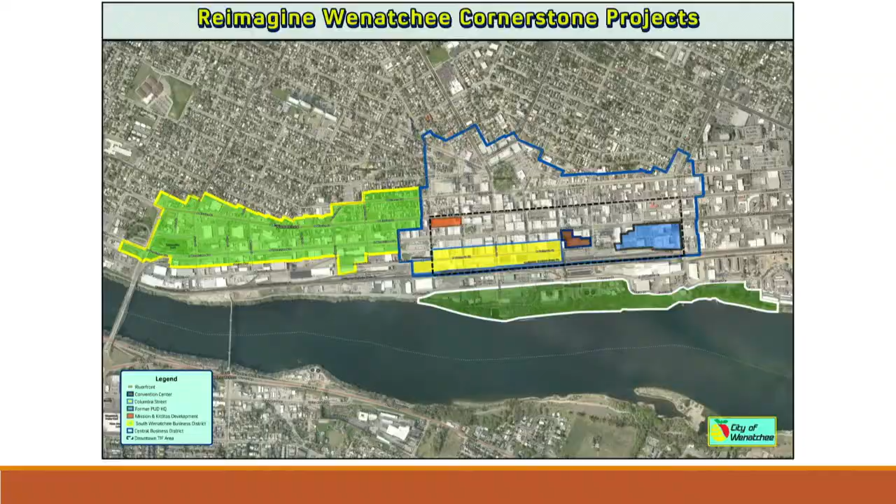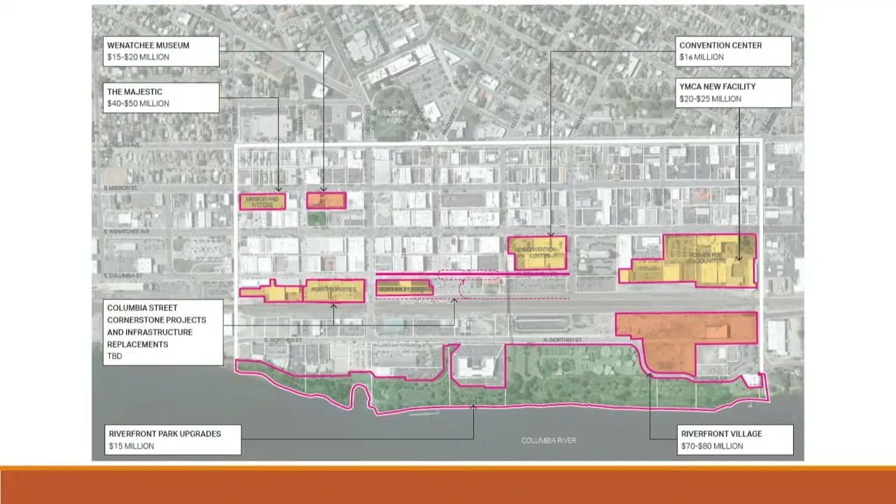This is an even more zoomed-in version. This is really a small geographic area, but Riverfront Park has about $15 million in upgrades over the phases of the project - not all at once, but still a big investment. There's also the Columbia Street project and a lot of forthcoming utility projects we're trying to plan together. The Majestic, the Widener project, is about $40 to $50 million. The Wenatchee Museum, which we'll hear about in a bit, is anywhere from $15 to $20 million. These numbers add up very quickly, and they're generally in a very small geographic area.

So where are we now? We just completed the discovery phase, meaning we met with a lot of folks to figure out what is going on and what the current conditions are. We did a driving tour with our consultant team at Northwest Studios, Link Transit, and the Chelan Douglas Transportation Council to understand the entire city as the scope, and how that fits and impacts the smaller study area, looking at it from a transit and vehicle perspective.

We also did a walking tour after that with a bunch of downtown stakeholders. We had about 35 attendees - it was actually very well attended.

We started at the PUD property on the south end and walked along the Ave down to the Columbia Street properties. During that time, a lot of the stakeholders were talking about how it'd be great if we had more housing upstairs in some of these units. This is really a challenge, or this is really an opportunity. So the consultant was collecting all of that feedback and that data.

The last thing we did was an overall public meeting. We invited that group from the walking tour as well as the driving tour to come down and actually start to think: okay, what does reimagining Wenatchee look like? They did an exercise with a postcard, saying, write yourself a postcard from the future. What does Wenatchee look like? That was the kickoff point to say, okay, we've talked about what's here, let's start to reimagine what could happen.

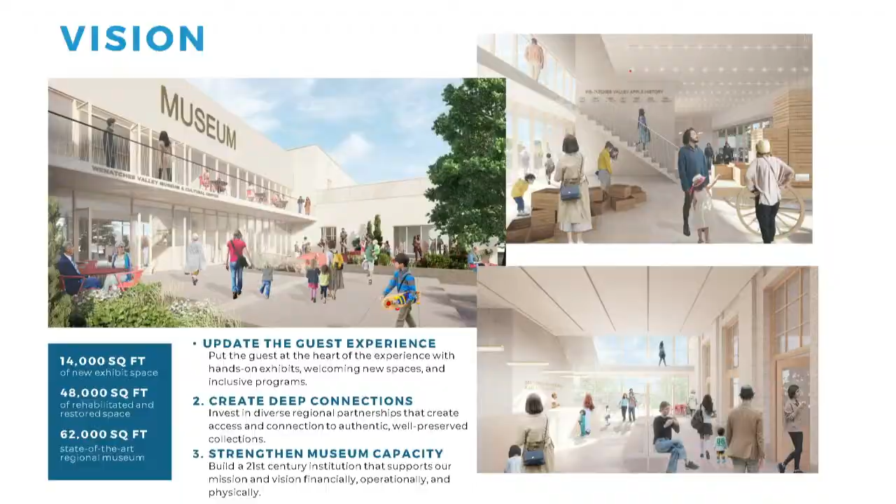From that, this concept came forward: in addition to needing to upgrade the overall facility, we had an underutilized asset at our back door, which was Centennial Park. As the museum, we wanted to use Centennial Park more for our programming, and we found that our community around us wanted to utilize it as well.

So the idea of flipping the front door of the museum, creating an engaging, open, welcoming lobby for the new museum with a new plaza that led into the park, really sparked the interest and excitement in a lot of our community members. We've been able to really see how this will change the museum experience.

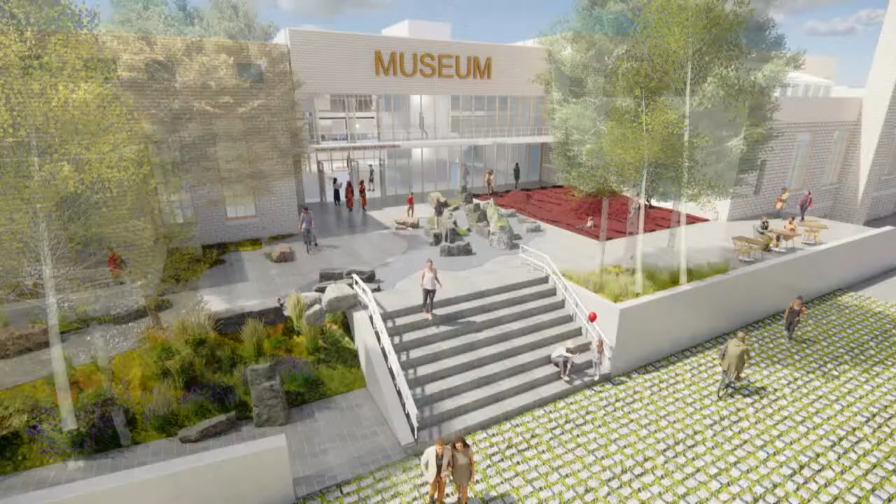It'll open up an outdoor opportunity for us, not only through programming, but just in the daily museum visitor experience. We're taking many of our amenities, like Coyote's Corner, our children's museum, instead of being tucked away on a second floor, bringing that down to the first floor. It's more accessible for families, and it lets us have that indoor-outdoor play space that a lot of children's museums have.

We're also, as you can see right next to the stairs, putting the ramp right next to the entrance of the museum, so everybody who enters gets to enter from the same space. Right now, if you need to use a ramp, whether it's a stroller, a walker, or a wheelchair, you actually have to enter through the back door of the museum, which isn't the most welcoming way to be welcomed in.

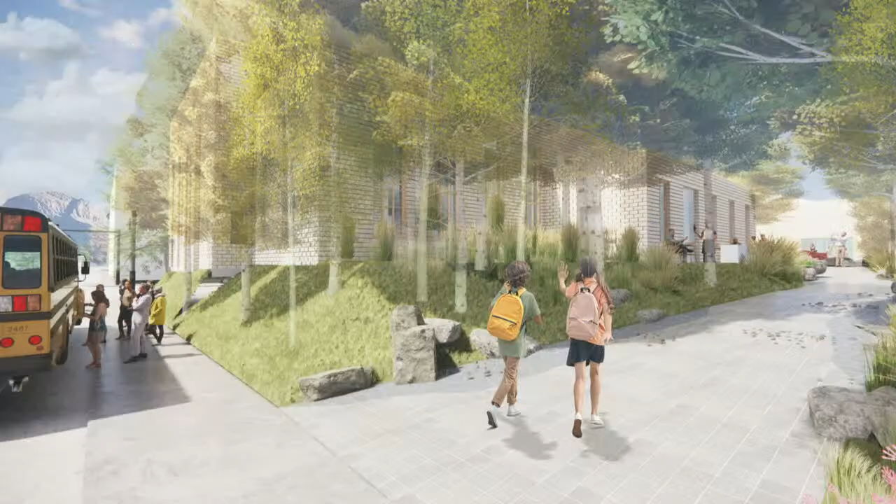School districts, in our strategic plan and our engagement with local and regional schools, are a very high priority at the museum. It was something we heard loud and clear from our educators: not only the museum going out to schools, but being able to come to the museum was very important.

So a lot of the modifications we're making are making it safer and easier for school buses to pull up to the museum, for a large amount of students to unload. Right now we have 2 school buses show up and suddenly 150 students are right there on Mission Street. We all know how busy Mission Street can get, and walking up a ramp with basically 1 door to get through takes a while for those kids to get in.

We're reconfiguring it so Yakima Street, which is a much quieter street, buses will be able to pull up there. There will be a ramp right there, and a large amount of school kids will be able to exit the sidewalk quickly and get into the museum.

We're also looking at the new lobby of the museum. If we rewind to that first picture, it showed this hyphen building right in the middle. It's mostly a glass structure, so a light-filled lobby. We're going to ensure that the historic parts of the building, those exteriors, become our interiors, so we're not going to be hiding them away, and they're not going to go into disrepair.

They're going to be right there in the walls of the new building, putting people up close to historic preservation, but in a light-filled way, with a central elevator and central stairs right there, and the opportunity to bring out more of our collections, putting collection pieces into the new architecture of the building.

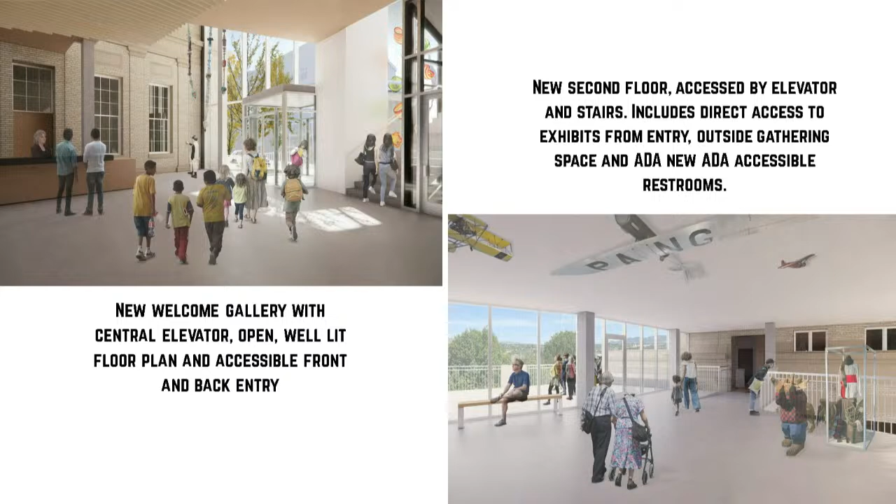That way there's safe access from the park, from downtown to the museum, and safe access from the parking lot right off the park. We're hoping it'll transform that neighborhood of Wenatchee Avenue. We're aware of developments happening close by, especially with the potential of many new residents coming in. With 200-plus households right next door to the museum, addressing the museum and the alleyway will ensure those residents have a safe and welcoming way to come into the museum.

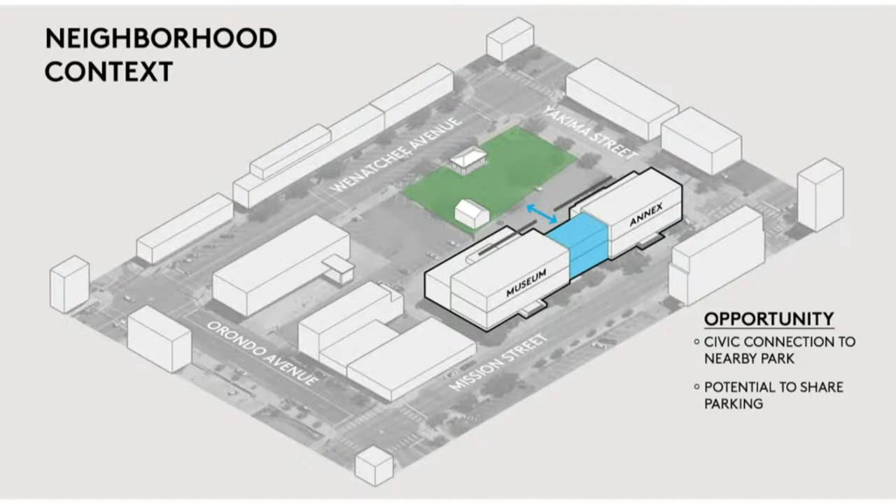By reactivating the park, we're hoping it will be an activation point for businesses along South Wenatchee Avenue. A lot of the foot traffic we see right now stops at Orondo Avenue. With a renovated museum and a reactivated park, pulling that walking traffic down Wenatchee Avenue will be a benefit for our neighborhood.

The site work, which includes the new plaza but also new public works like fire hydrants—we're putting in 2 new fire hydrants down there. We're rehabbing the alleyway too, since our maker space is right off the alley. It's not in great shape right now, and we want it to be a welcoming and safe place to walk up to.

In addition, we've estimated anywhere from 4 to 6 million for new exhibits—not only along the second floor of the museum, but also new exhibit spaces downstairs.

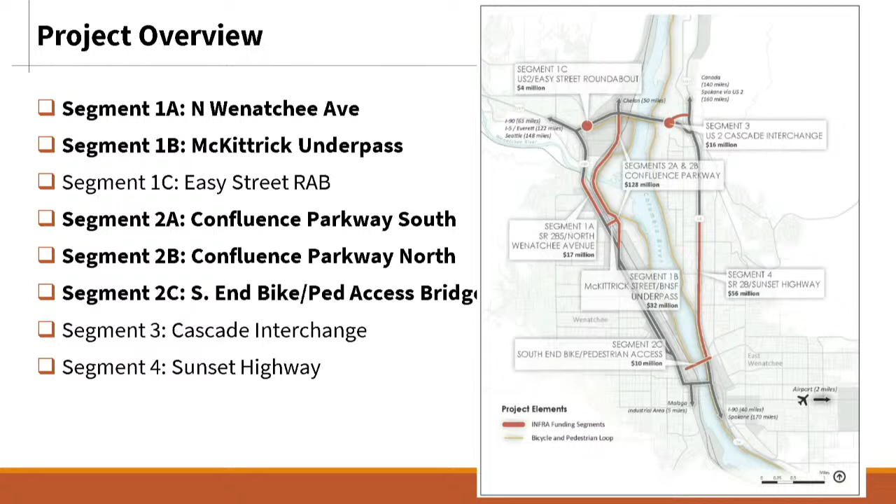So just to kind of set the stage, the first part I'll be updating you guys on is Confluence Parkway, which is really a combination of the McKittrick Underpass and then Confluence South and North, because we are delivering those as a single project. In the spirit of a work session, I'll go through this, but if you guys have questions, just hop in and ask me. Of course at the end I'll want to answer any questions you have as well, but happy to have this be an interactive discussion.

Just to update and make sure we're all on the same page in terms of what the project was, an overview here: the primary goal is to create a new north-south route through Wenatchee, paralleling SR 285 and providing another access across the Wenatchee River. This builds a 2.5-mile arterial street, primarily to provide congestion relief on 285, which in addition to cars, also improves the reliability of our transit service, as well as providing an additional route for emergency evacuation on the north end of town, where we are constrained by the Columbia, the Wenatchee River, and the foothills to our west.

The 2-lane arterial street will consist of bike lanes, sidewalks, and a 2-way left turn lane where appropriate. We are eliminating 3 existing at-grade crossings of the railroad through the corridor, constructing 2 new grade separations, building a 700-foot long bridge across the Wenatchee River, and relocating about a little under a mile of the Apple Capital Loop Trail, which is the location where it parallels Hawley Street, kind of as a sidewalk there between the road and the PUD parking.

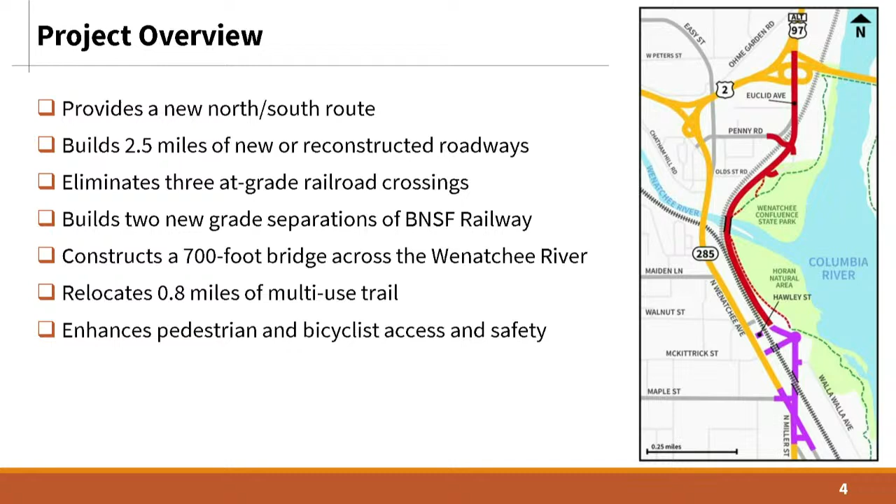So the project was broken into two segments, really. As I said before, the INFRA award only funded the Confluence South, so that's everything from Hawley to the south. That includes the 2 grade separations and some reconfiguration of the intersection at SR 285, Wenatchee Avenue, and Miller Street.

The Move Ahead Washington funds received can be used on that Confluence South segment, as those were a Confluence Parkway infra match amount. This will be the primary focus moving forward, because with the grant came deadlines - we need to obligate all of those funds by next summer. So we need to advance our design, determine the actual scope available within that funding that meets the purpose and need of the project, and provide that to the feds to release the remaining funds. If we miss that deadline, the funding is at risk of being lost. That's been another reason for the whirlwind this year.

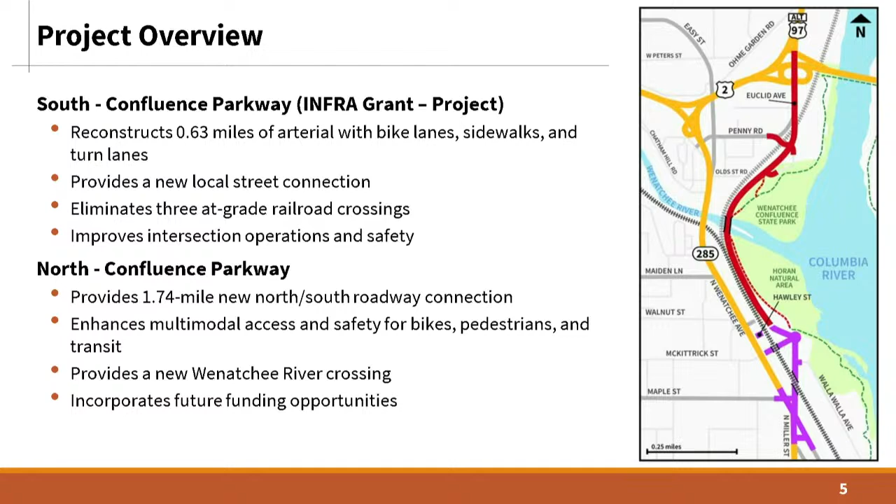A few other key considerations were also discussed, and I wanted to share those as goals that rose to the top over the course of our procurement process. With a project of this size, it's a major investment for the city. We're adding 2.5 miles of road, 3 new bridges, and a lot of other related features to our system. So building a facility that minimizes our long-term maintenance and operation will be a key consideration in our decision-making going forward. We really want to set future Wenatchee up well with this investment.

Landmark for the future - it's a big opportunity with this major project, and we want to make sure we walk away with something we're all proud of. This new bridge over the Wenatchee River will be accessed by everyone from cars, buses, bikes, and pedestrians. We want this to be something our children can be proud of for years to come. Part of that is making sure the decisions we make on this infrastructure fit the access, aesthetics, and other things of the area and surrounding infrastructure.

Last but not least, we want to maximize the project with the funding available, and also the deadlines, most importantly. So making good, effective decisions on right-of-way acquisitions, utility coordination, and all those other things in order to meet our deadlines and use all this funding.

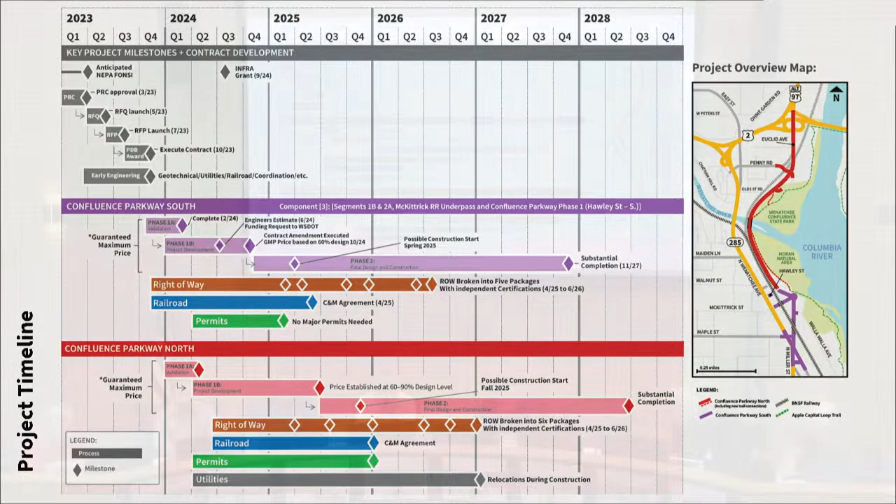So moving everything as you're driving north to the left, so that you're preserving Miller Street and raising it up over the tracks, how does that affect the existing businesses in that area?

So one of the things we considered when looking at this, and we've met with the owners of that complex, including showing this exhibit, is they have access right onto Miller Street as it is. When we started really looking closer at the line work developed in the preliminary configuration, there are going to be big impacts to those businesses and how they operate. It seems there's a strong likelihood that it will result in a total acquisition.

And so if we're going to be acquiring those parcels and paying to relocate them, by shifting this we can now avoid impacts to the other side of Miller Street.

But raising it up high enough doesn't give them access, or it just doesn't work for support of the raised road? No, so whether we go over or under, there was going to be significant walls between the tracks and getting towards the Circle K lot there.

You can kind of see the little blue boxes, and that was something we were tracking, looking at the accesses and profiles to make sure that where those existing accesses are, knowing where the driveways would be and if they are still feasible to remain.

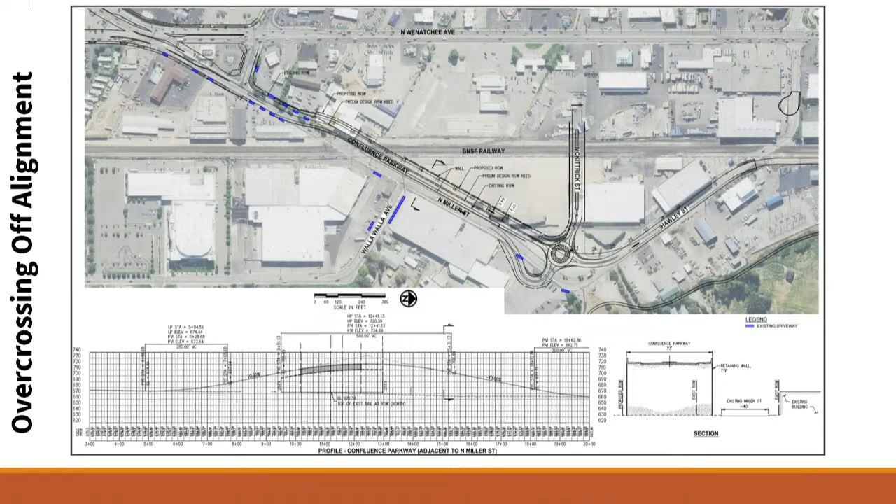Another part of this, in addition to the large utilities under Miller that were looking to be problematic if we go under, was working with the railroad. If it is feasible to go over, it could be an uphill battle with them to go under, because with an overpass, that will be our bridge, but if we go under, that's a railroad bridge. They would much rather be on fill than be on a structure themselves - it limits their future growth opportunities and increases their maintenance. That was another consideration that was looked at.

You've done a lot of work, you got a lot of work to do, so congratulations to you and your team. It'll be fun to see this work its way through, and I know there's a lot of moving parts. I know the 85 million has a little bit more flexibility than the 92 million does, so I know you're really juggling to figure out, and the 92 has got a time frame that's got to get cranked. I know you're taking that all into account as you plan for it.

It's a good point. As we move forward with this partner, we look at the project as a whole. There's a lot of elements, and we have identified the strategic objectives - I'd say really these two grade separations and the bridge over the river. We need to have an access across the river, so we'll be keeping that in mind, and that's going to be part of that balancing. I think it can lead to maybe some design revisions, practical design opportunities in other areas.

Such as the intersection through Olds Station, where we'll look for opportunities for value engineering, because the biggest cost of the project is absolutely the right-of-way acquisition. We have some parcels we know we have to go out and acquire, the McDougal warehouse, and some of the others are covered in that land exchange agreement. So we'll be working through that, and I know that has been another topic as of late.

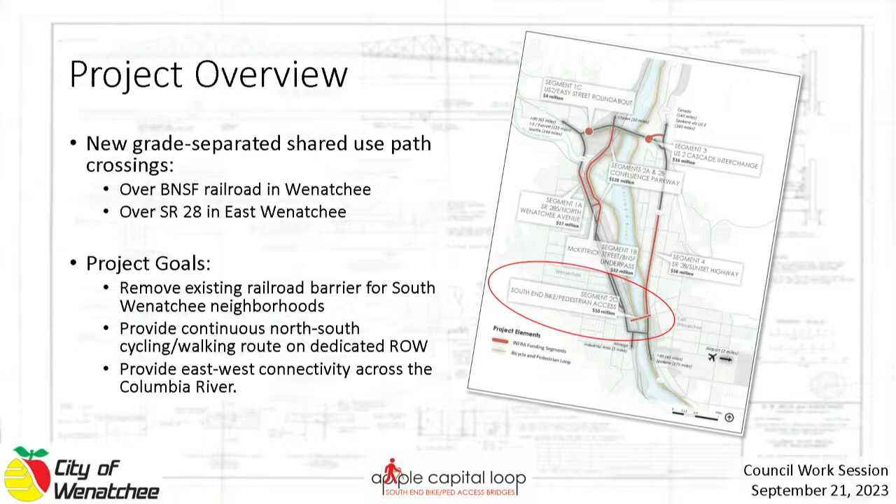So going towards those initial project goals of providing this benefit to South Wenatchee area, we also have other commitments to this area. Emma's leading a South Wenatchee corridor study, which is going to lead to great improvements where we're going to be analyzing channelization and bringing that downtown feel further up all the way to Ferry Street. We've performed a South Wenatchee bicycle connectivity study through the Chelan Douglas Transportation Council, which is very reflective of the need for this South End bike ped bridges project.

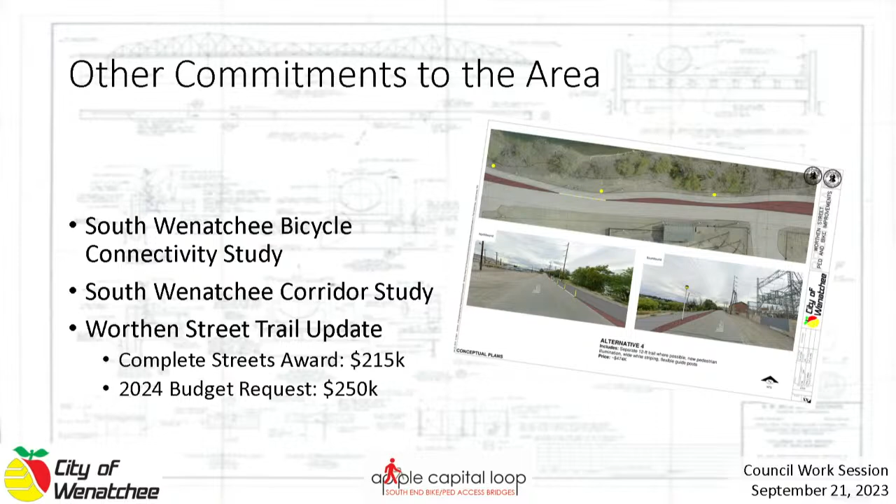And then we're also working on a Worthen Street Trail update, which you'll be seeing a budget request for next week. So moving back into the Ped Bridge project, we have been underway since June on this one.

We've got a project team in partnership with the City of East Wenatchee, with Exeltech Consulting. They've been in business for over 30 years, and they have a lot of experience doing similar type bridges, ranging from pedestrian and bicycle bridges like we've got going on here to also full vehicular access.

Joining Exeltech is a couple of local partners: RH2, Aspect Consulting, and Northwest Geodimensions. They're performing our civil work, our surveying, and then geotechnical analysis. And then they've also brought on some other partners, Aquaterra Consulting, Eco Assets, and Michael Miner Associates, who are going to really be helping on that environmental aspect of the project.

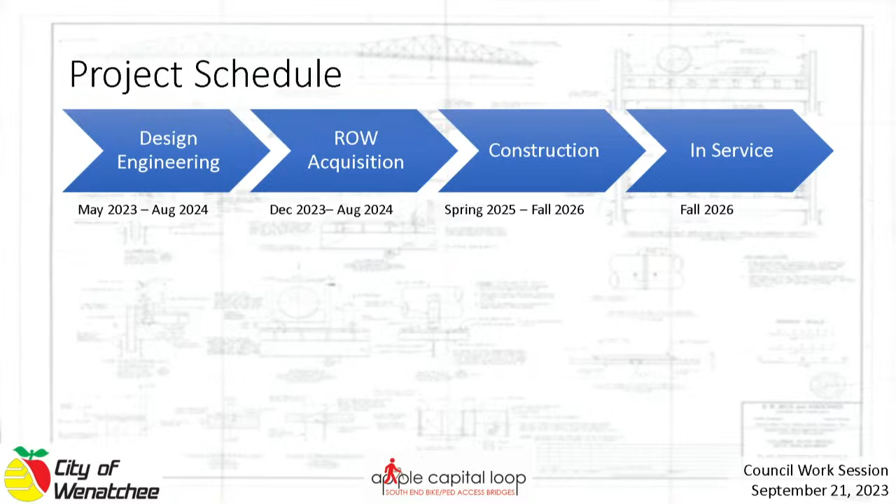Project schedule: we're following the more traditional design, bid, build process. So we're in the design engineering phase right now. We're going to be moving into acquisition once we get completed with our environmental work. Then construction is anticipated to start spring 2025 and ending about 18 months later, fall '26.

In order to get to our obligation date of September '24 next year, like Jake had mentioned, we're making our way through these different steps. As you can see, we have actually just wrapped up our alternative analysis, and we'll go over what the preferred selections were. In that alternative analysis, we looked at a number of different factors: cost, constructability, design delivery time, again to Jake's point of us making that September timeframe, permittability, traffic, constructability.

And at the same time, we were also looking at what this bridge is going to look and feel like in 10 years. We didn't want to limit our decisions based on some of the concerns of making it to the September timeframe. We're committed to doing that, but we want that best product at the end of the day.

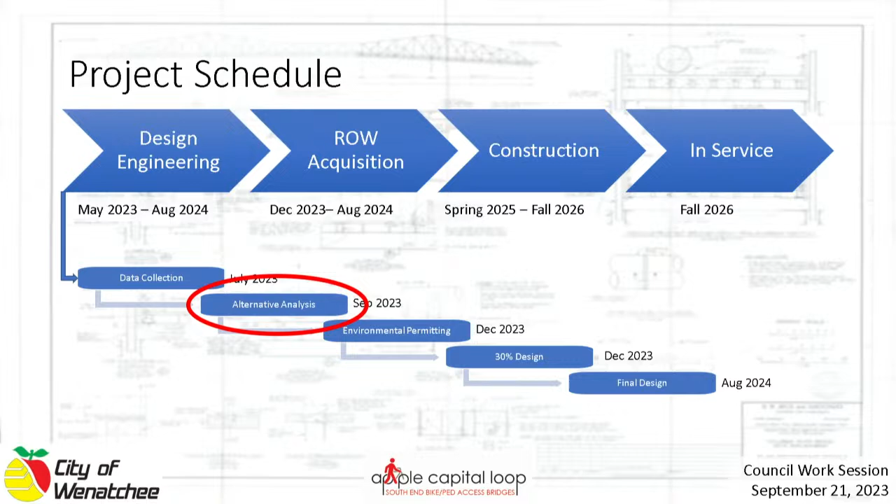So moving forward into this East Bridge preferred alternative, we looked at 3 different alternatives for the City of East Wenatchee's side. One being 2 helical ramps on either side of SR 28, and then this preferred alternative going all the way up to their new 9th Street Park.

We ultimately chose this because of the connectivity that it provides for the City of East Wenatchee's downtown. At the end of this project, you'll be able to go from East Wenatchee's downtown to Wenatchee's downtown on a dedicated pedestrian and bicycle route. And so the placemaking opportunities here and just the atmosphere that we can gain through going all the way up to Valley Mall Parkway was ultimately the decision factor in this.

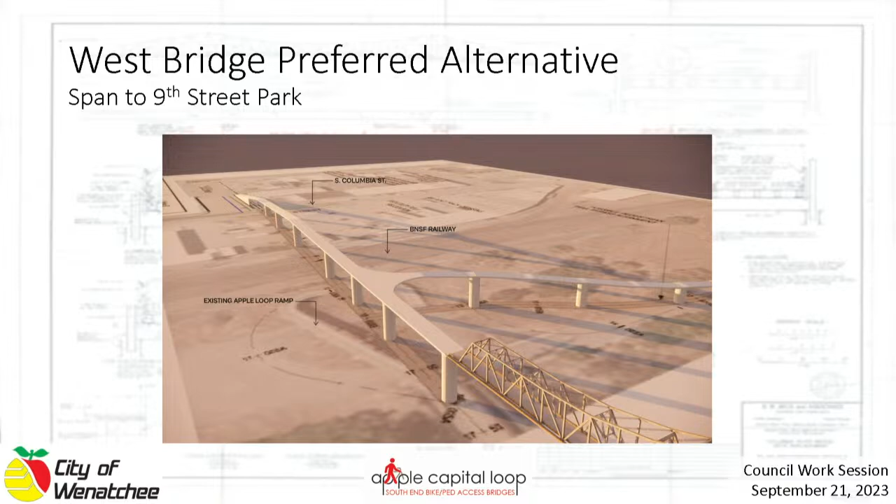This alternative was ultimately selected because of the connectivity and smooth transition for all types of users, bicycles and pedestrians of all ages. It also provides easy access from our South Wenatchee neighborhoods, which is really the point of the project, to get them up and over, either to the Loop Trail or over into East Wenatchee to live, work, and play.

Here's a better illustration of what the final product will look like. There's going to be a new ramp from the bridge that'll tie in down towards Hale Park. You can't see the full configuration, but it's going to hug along the BNSF right of way for a while, then taper back into the Loop Trail. This shows where the helical ramp's going to be coming together.

Exeltech's got a great team, including landscape architects, who are going to be looking at the placemaking ability to make it feel like a very inviting gateway into this area.

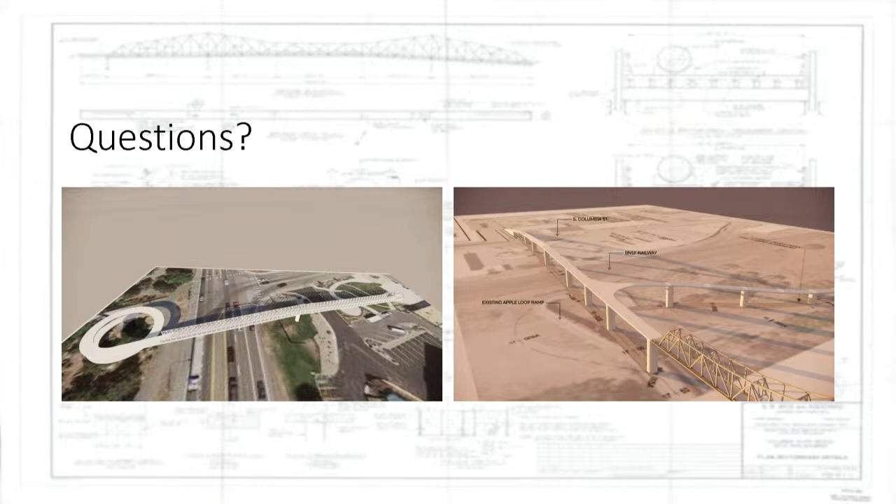So with that, I wanted to open it up to questions. The question was about the width of the new path on the Wenatchee side—when you ride your bike up there, you sort of run into the person coming down, or there's just not a lot of room, or you hit the fence. You can't quite see it here, but it is going to be 12 feet wide. The existing ramp we have on the Wenatchee side is 8 feet. This 12 feet is designed so that two people can be walking and there could be a crossing movement without having to wait or stage to get around.

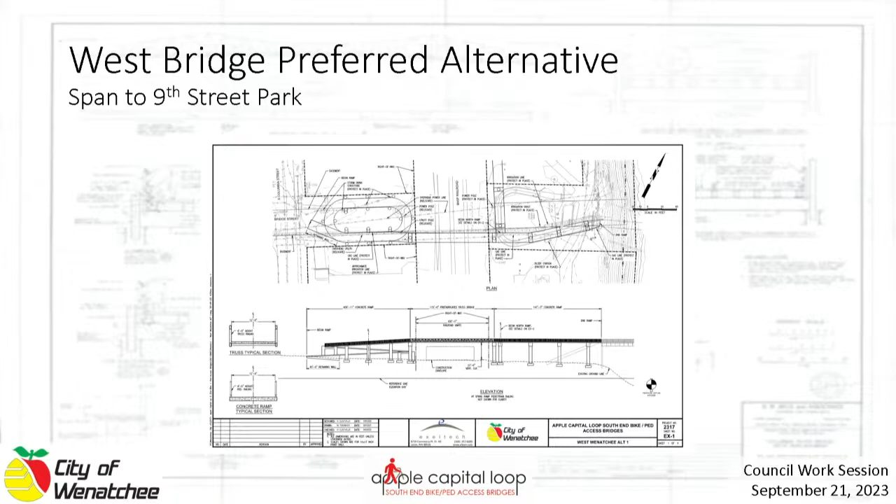Ryan asked about not seeing any lights. This is just the alternative phase, technically 15% design, so lighting is very much an element we're going to be looking at, both for user experience and security purposes, and that will be incorporated as we move further into the design. There'll be lights not only on the trail part but shining down underneath in the little dark recesses where people might tend to gather.

One of the factors we were considering in looking at our alternatives is preventing certain behavior and increasing security in the area. That's why having these raised ramps rather than walls was put in, and that is going to be a consideration. As we move further, we'll work with Dave Erickson to come up with strategies based on what they've experienced in this area and ways to mitigate future interference in that regard.

I have a curiosity related to the overpass concept at Miller and the railroad. What's the clearance that we need above the rail? Yes, so for over the railroad, it's 23 and a half feet. And that leads to our ramps on the Wenatchee side being significantly longer than the East Wenatchee side. That clearance requirement is 17 and a half feet for pedestrian bridges. So we're 24 over railroad, but 17 over highway.

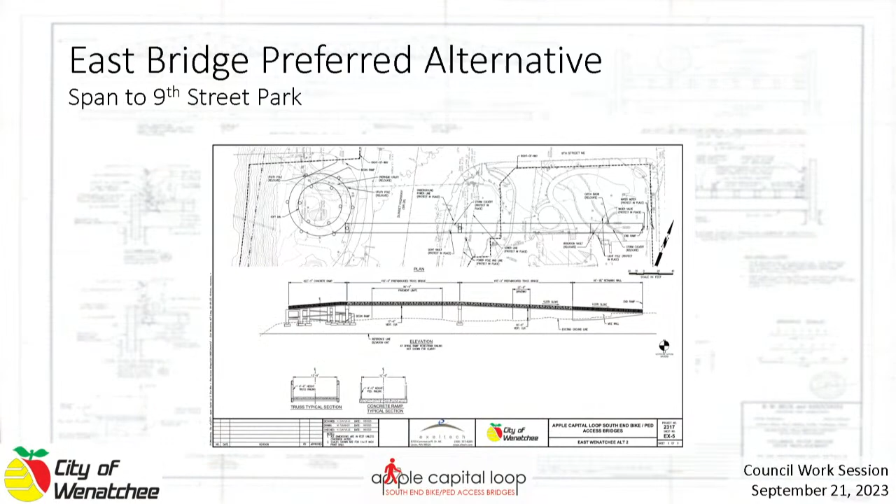No, when I look at the design, it looks like the exit of the helix is across the street over in their plaza, their new plaza. So is that where I get on the trail, or is there also an access from the existing trail? There is access from the existing trail - we'll be going up from the existing trail in the helical motion up and over. There's another picture that shows it better - I think that right there, yes, that's better, thank you.

This lower one on the left is on the Wenatchee side. So you'll grab it, go up, cross over, and land into the East Wenatchee side at the top of the screen. But where it lands in East Wenatchee, I thought was across the highway. It is - it's at their new park. So the existing trail is underneath, on the west side of Sunset Highway now, and you access right there.

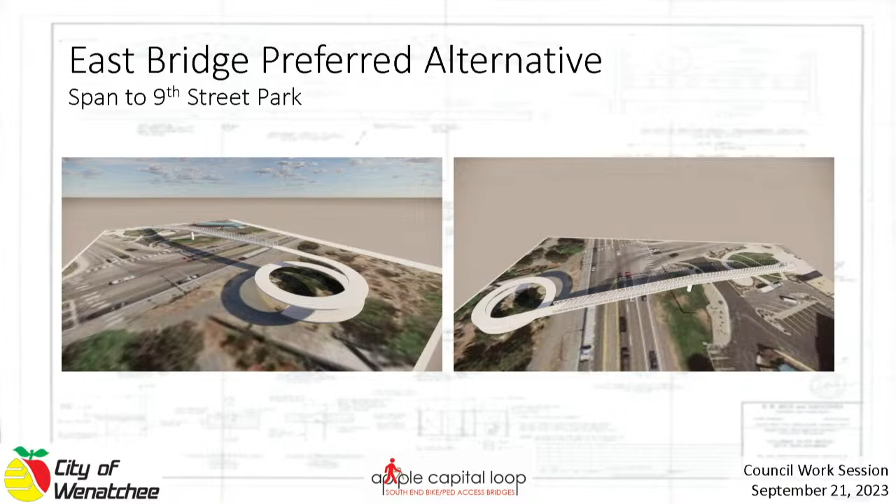It's just hard to see, I guess. Yeah, it's hard to see. Yeah, underneath - the existing trail out to Hydro or over through the rest of East Wenatchee is going to be maintained, and this new ramp is going to be in the location where the boulders and vegetation currently are.

Any other questions for Ryan? I think the Public Works Committee saw this, or the Finance Committee, one of them saw it a week or two ago. I'm starting to lose track of which one.

And to that point, we do have a grant application we're planning on applying for. It's due next Thursday. That will be making us whole on this project, and there's multiple opportunities for pedestrian and bicycle access. So we're pursuing all those. Thank you for doing that. All right, thanks, Ryan.

Emma, did I steal your thunder? I'm sorry, I feel bad now. All right.

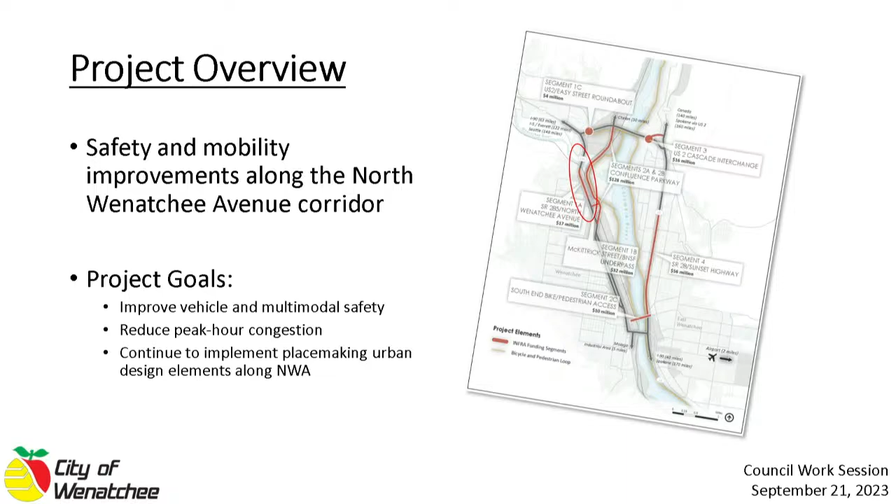So to go all the way back to the beginning, this effort of planning North Wenatchee has been going on for quite a while. Originally, we had KPG partner with us and WashDOT to develop what's called the North Wenatchee Avenue Preliminary Engineering Summary Report. That effort was undertaken in 2018 and 2019, and the intent was to identify design parameters for North Wenatchee Avenue and guide the implementation of the funded portions.

At that time, the Connecting Washington package had gone through, so we had that $23 million for the Wenatchee side, and the scope was just to make improvements. There was no specific scope, and then also to identify a slate of future projects to be funded on the corridor. Up top is the outcome of what that study was.

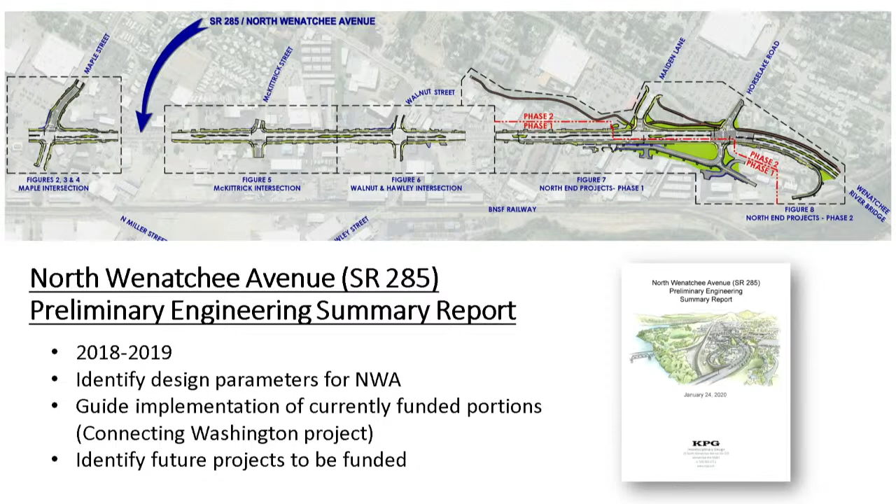It built upon, so there's a North Wenatchee master plan, a North Wenatchee Avenue concept plan, a North Wenatchee transportation plan. There's a lot of plans out there, but at that time there weren't actual cross sections or a specific scope of how to do it. So the point of this study was to complete that planning level effort.

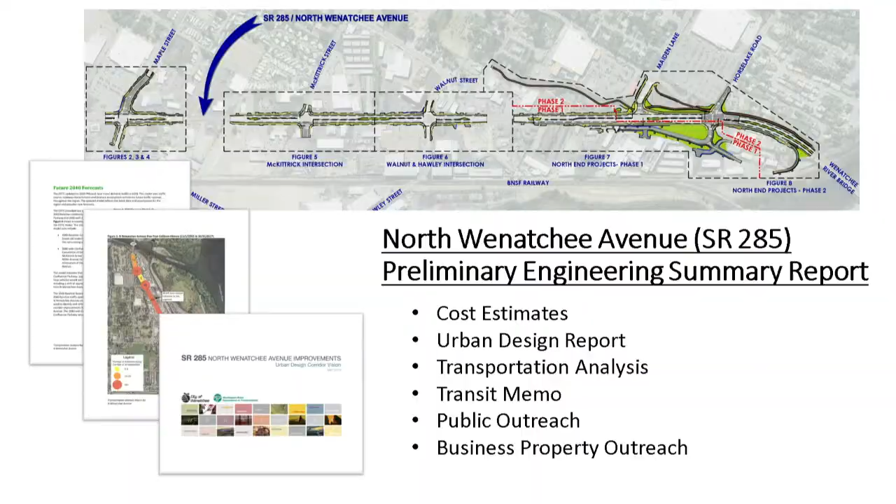Out of that summary report, we also got some cost estimates, an urban design report that outlined those placemaking features, and a pretty good transportation analysis. During that effort in 2018 and 2019, a somewhat significant amount of public outreach was done. I think I saw some of y'all's names on the various reports and public outreach. This next slide shows the result of that public outreach.

I believe that open house was probably at the new WashDOT building a few years back, and the feedback from that effort was that the goals, or what people want to see on the avenue, is better vehicle flow, a safe pedestrian-friendly walkable community, promoting economic growth and development, and also just creating a new look and feel for the avenue, making it feel like a community and a safe place to exist on all types of transportation, not just cars. So since that effort, that summary report was published, I think in January of 2020, and it had a lot of components to it, and it got us going in a good direction.

Since that was published, WashDOT, we got a lot more information. WashDOT performed a survey. We had further information to feed a traffic analysis and a better idea of regional mobility needs. For example, Link Transit had identified a couple needs that maybe hadn't been placed correctly originally in the study effort. So the city of Wenatchee partnered with CDTC, Link Transit, and DOT to nail down the scope of how we're gonna spend the $17 million that's remaining after the Easy Street roundabout was constructed.

So we had several stakeholder meetings and we're not quite done with the final report, but the outcome of that study dialed in the scope for how we're gonna spend the Connecting Washington money and parsed out the phases. Not surprising to anyone, the $17 million is not gonna take us as far as we thought it would in 2019, pre-pandemic, pre-everything. So we wanted to revisit the cost estimates and make sure that we can deliver the project we're committing to deliver, and also just to make sure that the major stakeholders - Link, CDTC, and primarily WashDOT and the city - are on the same page and kind of holding hands and walking forward, and we all agree and we're all on the same team.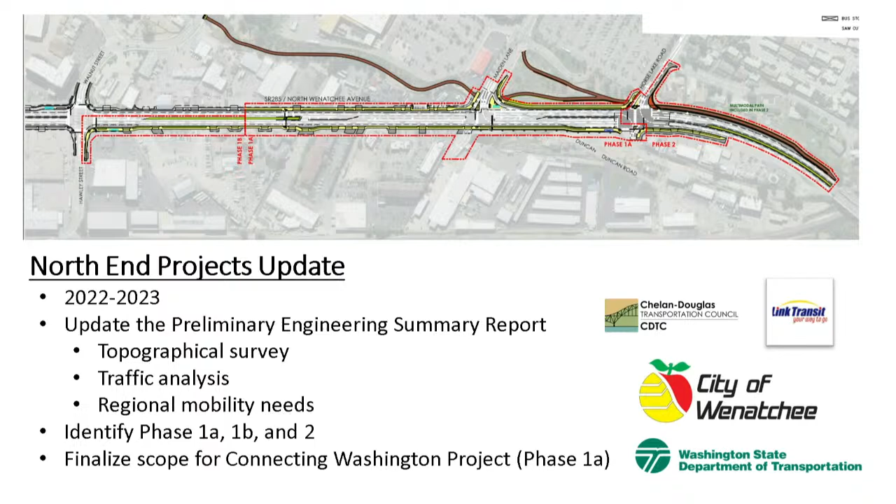So essentially what we decided was, I think it's in the next slide. This middle section, which is phase 1A, is what we are comfortable committing to deliver.

For the past 5 years, it's been undetermined whether WashDOT or the city was going to deliver this project. As part of this effort, we revisited the scope and looked at the stakeholders who'd be impacted, and what the city views as priorities in terms of placemaking. We care about mobility, absolutely, but we also care about our community.

It made sense for us to hang on to the design and deliver it as a city. The $17 million is all DOT money—there's not a local match currently—but it makes sense for us to lead the discussions about right-of-way and access. It's the state highway, but it's in our urban area.

The state should control what it looks like, yeah. It's a very urban project, and the north central region of WashDOT doesn't have a lot of really urban areas. I think we're kind of the forerunner in delivering those kinds of projects, and so I think we can do it.

We're currently in the process of understanding what funding's gonna look like, and as soon as I get the okay from WashDOT, we're gonna get an RFP on the street to pick up a consultant and start moving forward. We have an obligation date we've committed to on the term sheet for the Confluence project of 2026 to obligate construction money.

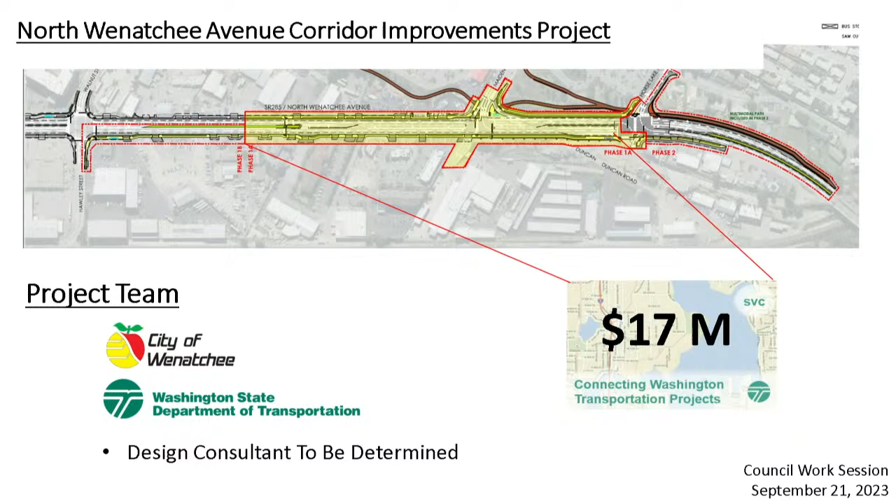So we'll get there. I'll dive a little into the specific features of this project, kind of where we landed. I think some of this might be new, and much of it is what was arrived at in 2018. Essentially, the main elements of the project are a raised median that restricts left turns off.

So is this all right in, right out? Yes, all right in, right out. It's a raised curb going down the middle, increasing the left turn storage to go up Maiden Lane to get to Walmart and Home Depot, so we won't see that back up into the main line.

So is there gonna be two left turn lanes or just increasing the length? It's one left turn lane, just increasing it by quite a bit.

What you can see here is a mid-block U-turn going southbound. The distance between Maiden and Walnut felt too long to not give someone an opportunity to do a U-turn and access all of the northbound businesses, so we kept that element in.

And then, basic widening of the sidewalk to 8 feet, with a 6-foot landscaping buffer where we could fit it in between.

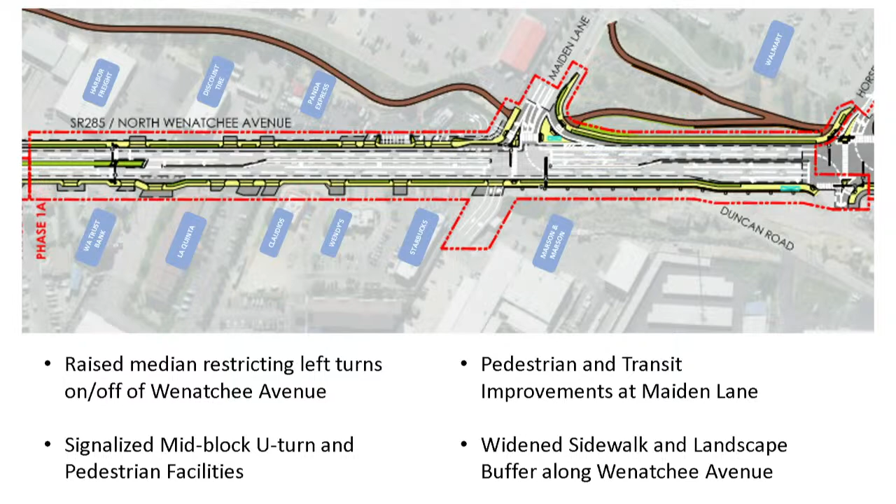To drill down a little bit, here's the cross-section of what we're envisioning currently. Don't hold me to this—we're probably at 10% design right now. This is just a quick way to see what it's gonna look like.

We'll see where we land with the median. I think Jersey barrier is really ugly, so I'm hoping we can have something that actually looks kind of nice. Tell us how you feel about Jersey barriers—have you seen it? Especially the tall stuff, it's as tall as I am, it's 5 feet.

So, yeah, this is just the cross-section, and that lane in the middle is actually just a left turn lane, and eventually when you're in it, you'll hit a U-turn and flip around.

Also, as part of this project, we are planning and budgeting to put in an entire new stormwater system. Does Jessica know about that? She gave me that blank look. I can't remember if I told her that yet, but I'm sure she'll be happy. It'll be great.

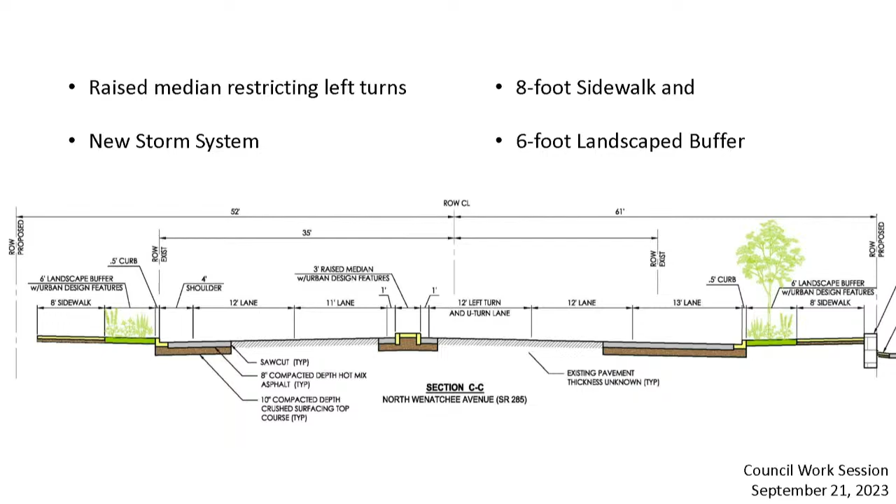So here's a zoom in of the mid-block U-turn. I tried to put the businesses in so you could see where we're at in space. They're pretty slick. We're planning to have a signal. It'll also be a good opportunity for pedestrians to get across the street, to make it feel more cohesive. So it'll be a pedestrian-generated push button, and also a sensor to alert the facility when someone's waiting to do a U-turn.

The idea is that signal will be hooked in with the signal at Maiden Lane and also Holly. Will there be U-turns also designed in at the traffic signals? Yes, yep.

Yep, and so ideally, in a perfect world we would have had the budget to do this mid-block U-turn and also construct the U-turn at Holly as well, continuing to go south. But that's what we call phase 1B, where if costs come down or things become more advantageous economically, that's the first thing we want to put back in so that it's more comfortable.

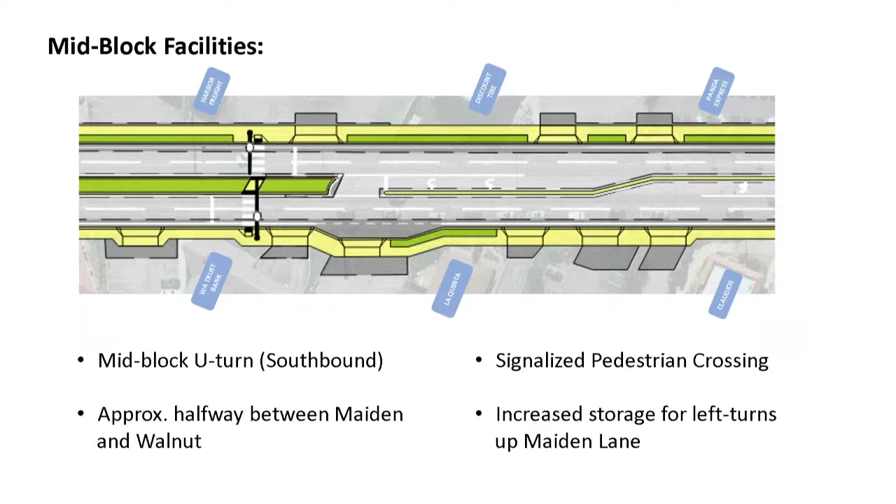Here's a close-up of the Maiden Lane intersection work. Originally in the old report there was an access road that came down and hooked into Horse Lake, and it was determined that wasn't necessary, and also it was one of the most expensive components of the project. So by eliminating that, we were able to bring in quite a bit of work at Maiden Lane.

This is a northbound U-turn, so if you're headed north and you're in that left turn lane, you can do a U-turn and get to Easy's and Discount Tire and all those stores. The east leg accessing Marson is retained with this design as well.

And a bus pullout to get the link buses out of the traveled way, and then just a little bit of a queue jump so they can jump in ahead of traffic prior to the signal turning green for southbound traffic, just to get them out of the way.

So if I'm coming southbound and I want to go to Starbucks, how might I do that? You would go, I think it's like 500 feet down, and do that mid-block U-turn.

Okay. Yeah. What if I'm a supply truck? If you're a supply truck going to Starbucks, you would take a right, you just do rights the whole way. So I'm coming south, where am I turning right to get to Starbucks? If it was me, I would orient myself so I was coming east on Maple or Holly and take a left.

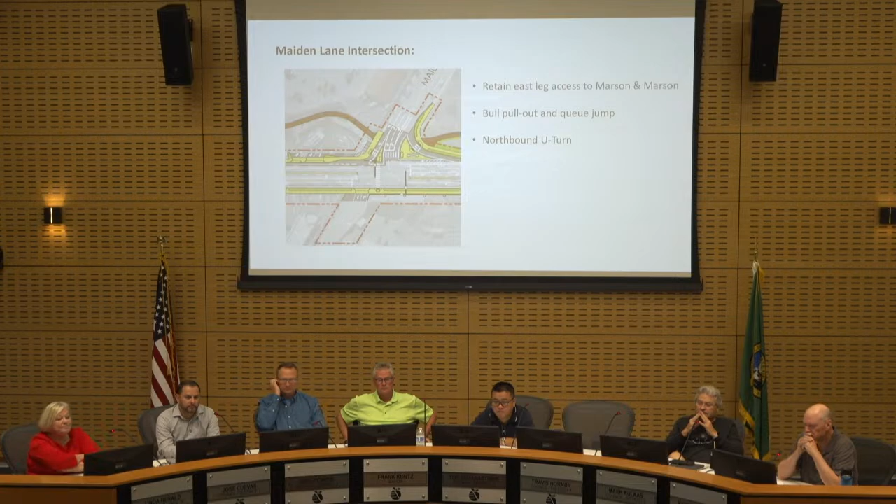Oh, so this, oh gosh, put me on the spot. It's okay. The ped trails shown here are now part of this project, but correct me if I'm wrong. Yeah, the brown thing was the acquisition of right-of-way and construction. Yeah, we got funded money for that, yeah. Yes.

We'll have the shared use trail from Walnut all the way to Maple on that old irrigation right-of-way. That'll start later this year, early next year. But we did receive 100% funding to acquire all that right-of-way, and complete design and construction of that piece. So that'll really extend our bike lane facilities, which currently stop at Pine Street, all the way to Maiden.

And we can do it on the same timeline as this project as well. Are you working with the Pathways project? Is this coordinated with what they're trying to do? Yes, we've been talking to Jeff Wilkins about what that'll look like and what our needs are in terms of what we need to identify. I'd like to talk to you about that. Yeah, we can talk about that. Thank you.

Okay, so as far as project schedule, this doesn't look as cool as Jake's did, but I tried. As soon as we get the green light, we'll get going with design and getting a consultant on board, and start right away as soon as possible. Right-of-way is going to be the critical piece for us.

There's quite a lot of acquisitions. They're all commercial properties, and they all involve big signs that aren't going to be there anymore. So that'll be an interesting journey over the next year. We ideally will get obligated in 2026 and then hit the ground running the following spring for construction. Hopefully finish it in one year, might take two.

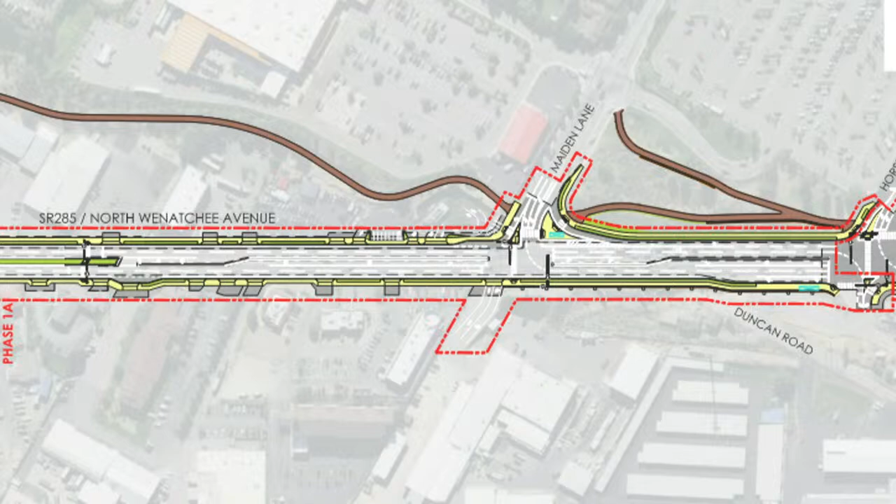Are there any other questions about the specifics of the design or what we're planning on? No, my only issue is we're stretching our staff pretty thin with all the work we're asking them to do. I know we've agreed to take this on because it's the right thing to do, but I'm assuming we're out trying to hire more engineers and more folks to help us with these things.

So we currently launched—was it today? Yesterday. Are we short two or one position? One more PE, but we did bring on Nicole here this year, so we did grow that PE staff. I think for instance on this project she's been doing an amazing job coming in and taking over McKittrick and Spring Water through construction, which are two really challenging projects to jump right into. As that wraps up, this is one opportunity we see for her, and she has a lot of experience at WashDOT.

While we are taking this on, we are going to remain in partnership with WashDOT. We've been continuing to meet with them to find efficiencies on how we can streamline some activities, for instance around right-of-way acquisition or even environmental permitting. So we'll continue to work in conjunction with them to try to find those efficiencies and ways we can streamline. But there is a large capital program over the next five years—we're over $200 million, so it's going to be a lot. But I think we are on the way of bringing in great consultants and will continue to look that way to help get us through this.